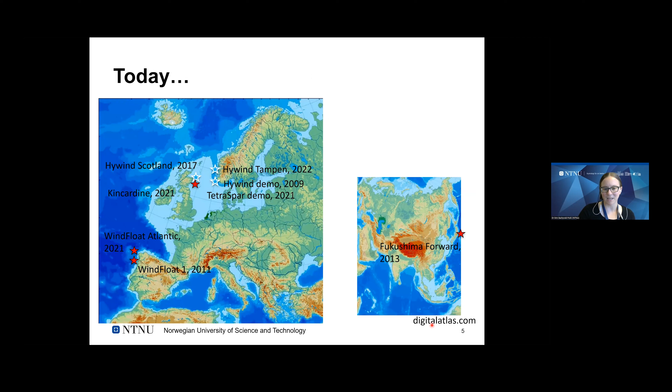If we speed up a few years and look at operational wind farms or demonstration projects today, we can see that a number of new ones have popped up, but actually a number of those are the same concepts still being applied. What's happened is that those concepts have just been upscaled in many ways.

On the left here, I'm showing how Hywind has grown, and this is very approximate, based on publicly available data. Not everything is publicly available, but you can see the 2.3 megawatt demonstration project, and what's being partially installed at the moment at Hywind Tampen, at 8 megawatts.

For Windfloat, I don't have an exact model of the Kincardine or other platforms, but they have indicated the size change with this Windfloat Pacific proposal, where you can see how a 2 megawatt prototype compares to a 6 megawatt platform.

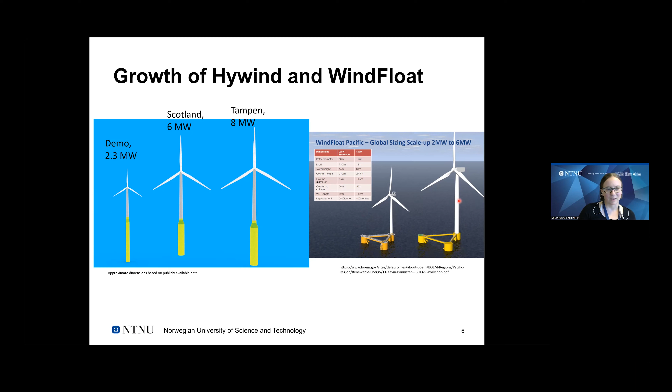Instead, I'd like to give a brief background to the different types of technology being applied, and then talk a little about where we go from here, especially with respect to optimization. The technology we see being applied, in this very fancy hand-drawn diagram, we could divide into the categories of spar.

Typically a deep drafted platform with a very small waterplane area has the advantages of being relatively straightforward to install. That's because it's got a catenary mooring system, slack mooring lines, which are relatively commonly used. The manufacturing is simple in terms of the components because you simply have cylindrical components to put together.

The disadvantage, of course, is that it requires a large water depth. And when I say it requires a large water depth, that's not only at the location where it's going to be installed, it typically also requires a large water depth at the location where it's going to be put together. So you might use a fjord where you can upright the spar platform so that you can install the tower and turbine on top. And then from that fjord, of course, you need large water depth all the way out to the location where the spar will be installed.

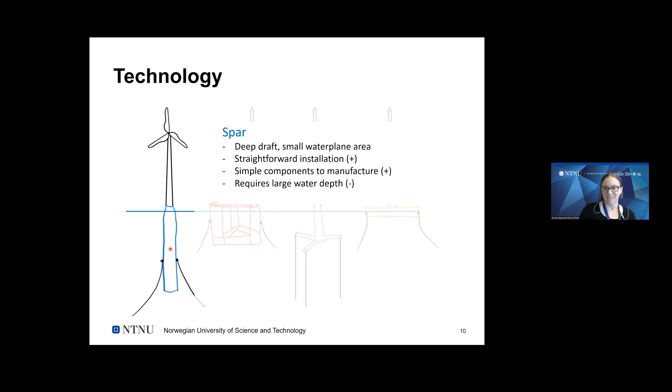Semi-submersibles are probably the most popular at the moment. These are characterized by these spread columns, which give them stability in a different way. The disadvantage of a semi-submersible is usually that because you have these spread columns, you're going to be more susceptible to wave excitation and might have larger wave-induced motions than, for example, the spar. Advantages, of course, are that you have a much smaller draft and you're more flexible with respect to water depth, and you can maintain this simple installation of the mooring system and just towing out the platform.

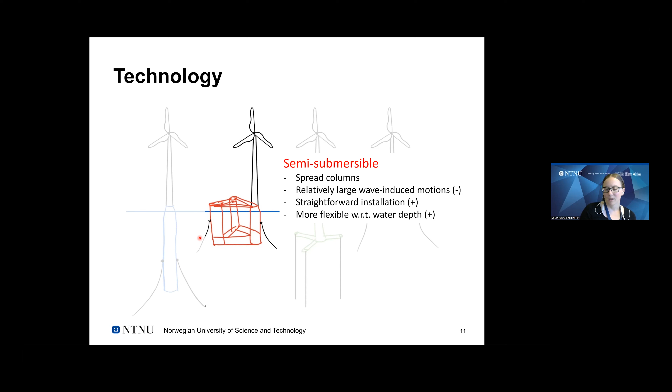We also have tension leg platforms as a possible concept, and here you might notice a relatively long list. There is perhaps some bias here since I wrote my PhD thesis on tension leg platforms. These have not been very popular for industry, however. One of the main reasons is that these vertical tendons, which need to be pre-tensioned, are expensive and challenging to install.

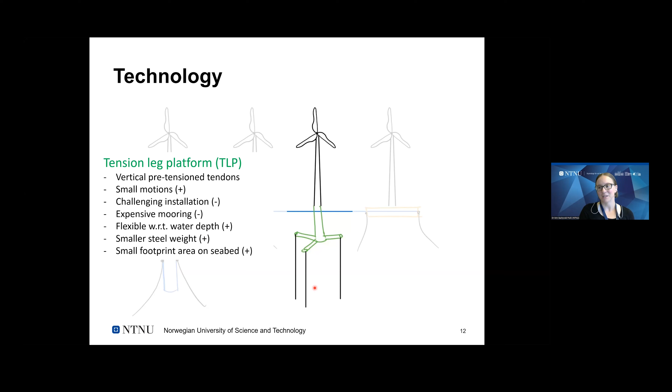The advantages could be that we have small motions, and we still have flexibility with respect to water depth, potentially a smaller steel weight, and also potentially an advantage of a small footprint area on the seabed, since we don't have a spread mooring system. That could be a potential advantage in cases when you might want to have fisheries or aquaculture sharing some space with the wind farm. On the other hand, you still have to deal with the power cable in some way, so there remain challenges there.

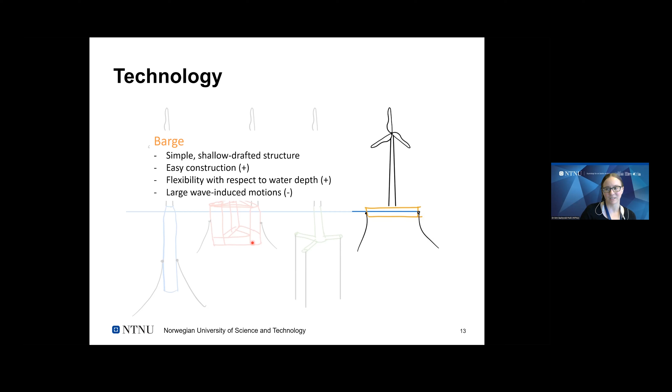Finally, we could have some concepts that we call barges, which have an even shallower draft than the semi-submersibles that we've talked about. And they have a clear advantage in terms of easy construction, very flexible with respect to water depth. Maybe they can even compete against bottom fixed in some cases. Disadvantage, again, you have a large amount of structure in the waterplane area, and that can have the disadvantage of making you more susceptible to wave-induced motions.

I've also put these into this stability triangle, which we sometimes use to illustrate how different platforms obtain their stability. Because of course, one of the first criteria for a successful floating offshore wind turbine is that it should float upright. This triangle has a point for ballast stabilized, meaning that you have a large heavy weight at the bottom, mooring stabilized, meaning that you're using the mooring system for stability, and waterplane stabilized, where you're using the waterplane area moment of inertia. And we can categorize those four types of concepts by where they are on this triangle.

So we put the spar at the top, the TLP at this corner, the barge in the buoyancy stabilized corner, semi-submersible somewhere in between. And even concepts that don't look quite like the ones that I've shown so far can be placed on this triangle in some way.

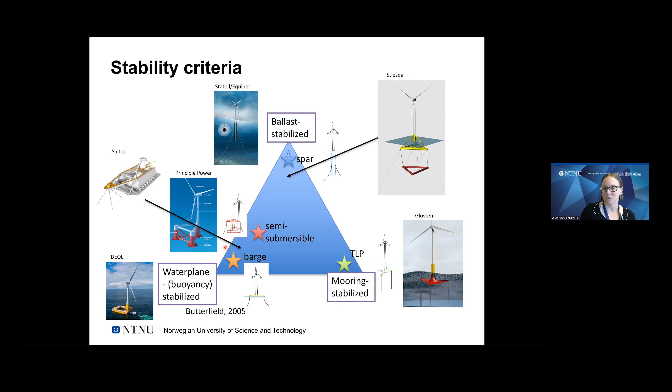If you've heard about the recent demonstrator installed in Norway, from Stiesdal, it can be placed as a spar because of its heavy ballast at the bottom. And if we look at the Saitec floater, which we'll probably hear about a bit more later, we can see that it would be closer to a barge type of platform.

So what is the actual challenge in all of this? Right now, the offshore wind industry is working to try to minimize what we call LCOE, the levelized cost of energy, while maintaining safety.

How do we get there? Well, there are two main contributions: upscaling, so larger and larger turbines, and optimization, so improving the technology, improving all the operations and maintenance and the supply chain all the way along. Dr. Sergenko is going to talk about upscaling. I'm going to focus on the optimization part.

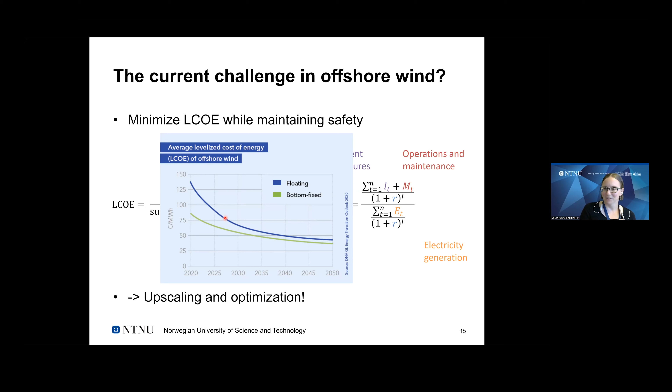Before I get into the optimization part, I want to make one more comment regarding LCOE, which is that it's a nice measure, but it really doesn't tell us everything. The real challenge we should be working on should go beyond the LCOE. Offshore wind is a non-dispatchable source of energy. It's intermittent, that's the nature of the wind, and that's hard to compare against a continuous electricity generation. LCOE also ignores environmental externalities, ignores other economic factors, and it's hard to compare new and existing generation.

One example of how LCOE might be a misleading unit to apply is if you consider that more and more wind farms are being installed, and the price you get for the electricity will depend on the other wind farms as well, because it's a question of supply and demand. We're now seeing that it may make a big economic difference to produce as much as possible in cases of low wind speed, when your neighboring wind farm can't produce as much. So there are factors hidden when we talk about LCOE.

Whether we talk about LCOE or beyond LCOE, what we saw before was a case where we wanted to minimize some kind of cost within some type of constraints. That is exactly an optimization problem. An optimization problem, and here are my last equations as promised, is defined by saying that we want to minimize something, an objective function. And that we can choose. We can choose it to be the cost of energy.

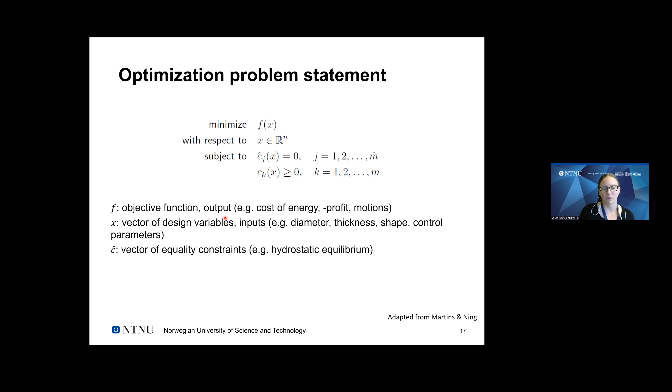Subject to, meaning we have some kind of constraints, which are either equalities that we have to match - for example, hydrostatic equilibrium has to be satisfied - or inequalities, like structural stresses that we cannot exceed, allowable accelerations in the platform, whatever you might choose to formulate your design problem.

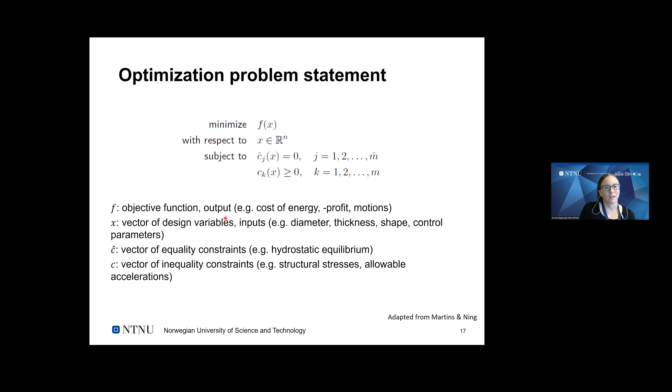In trying to do optimization of floating wind turbines, I would say there are maybe three main challenges we have to overcome to be able to really use computer-based design optimization beyond just human optimization efforts. The first is defining the objective and constraints. Second is parametrizing the design space. And the third is evaluating the candidate designs efficiently.

Clearly there's still a lot to be done on this, because if we look at the literature, we look at the market, there are a huge number of designs. I'm not saying we're necessarily going to converge to one, but probably we need to work more on defining what we mean by best, in order to say which ones will be most appropriate in which situations.

So if we look at our first challenge, defining the objectives and constraints, let's think about that a little bit. An objective function tells us what we mean by best. What does the word best mean to us? It's not quite that simple. It has to be something you can define mathematically, and also something you can estimate from the inputs you're given. A computer can only solve the problem exactly as it's posed, so we have to think really carefully about what we choose here.

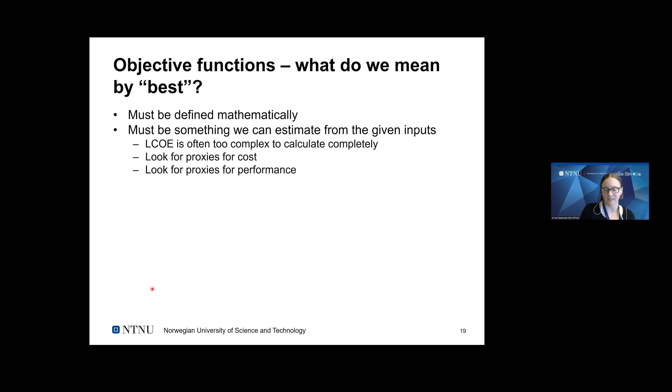At the moment in research, LCOE is actually probably too complex to calculate completely. Things like installation costs, operational costs, and even the details of construction costs are often beyond our simple tools at the moment. So we're often looking for proxies for cost, maybe mass of steel as a good example, and also for performance, so that we know something about the amount of power produced, but also about the quality of that power, how variable it is over time, for example.

We also have to define our constraints. So what do we require of this design? Again, it has to be something we can define mathematically and something we can estimate from the given inputs. Some examples might be: we have to have equilibrium, we have to have a certain amount of static stiffness so we can't have too large a static pitch angle, we want it to fit into a shipyard where it could be built, it needs to be able to be floated out, fatigue and ultimate loads, we can't have it failing too early, and things like nacelle acceleration related to the wind turbine performance might also be considered.

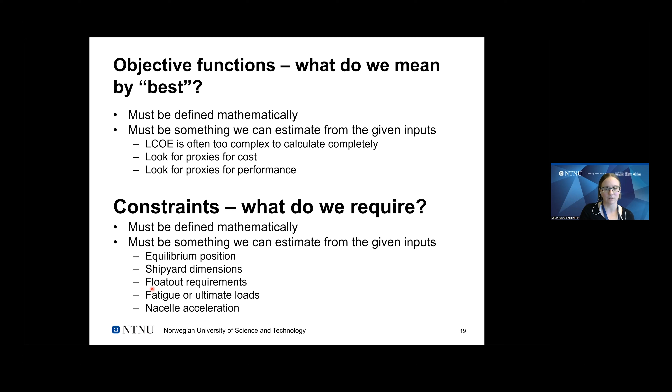If we can define the objective and constraints, we also have to define the design variables. So the second challenge will be trying to parameterize the design space, and here there are a number of choices that you can make.

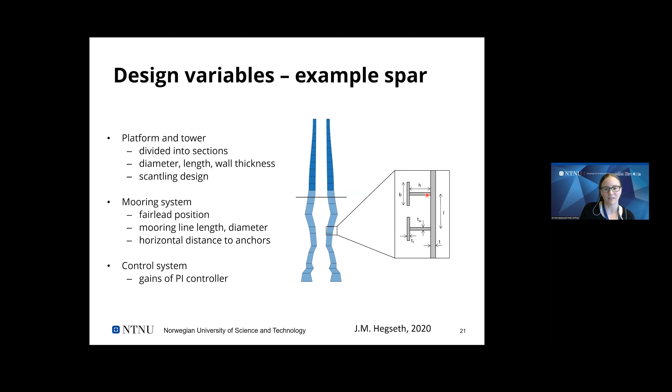Just to give you an idea of where we are in the research community, this is a first example, a 10 megawatt spar. In this case, the platform and the tower were considered as the design parameters, primarily for the optimization, along with a little bit of the mooring system and control system. The tower and platform were divided into sections, and each section could be given a diameter, a length, and a wall thickness. On top of that, we also had the scantling design, meaning we're trying to look at how much steel you might need in terms of stiffeners and the details there. In terms of the mooring system, there was the fairlead position, mooring line length, the diameter of the mooring line, and the horizontal distance to the anchors - quite simple.

We also included the control system in this optimization. The wind turbine has a controller for the blade pitch and generator torque. In this case, it was the blade pitch controller which was included in the optimization, and that actually makes a difference. Due to time, I'm not going to go too much into the details of that aspect though.

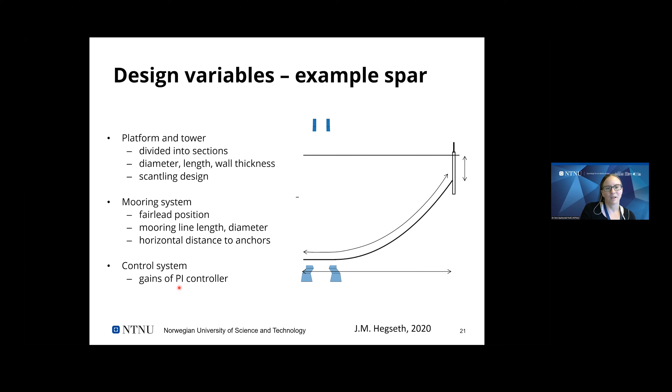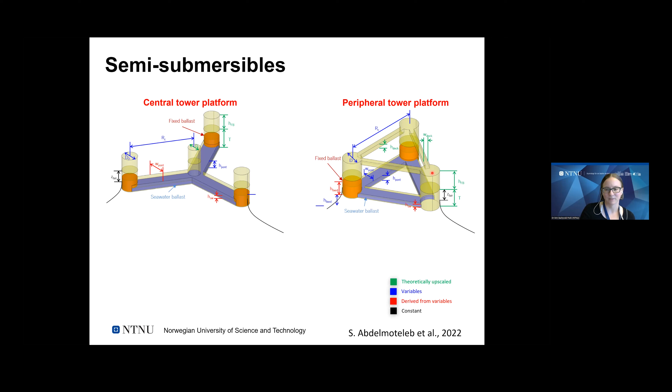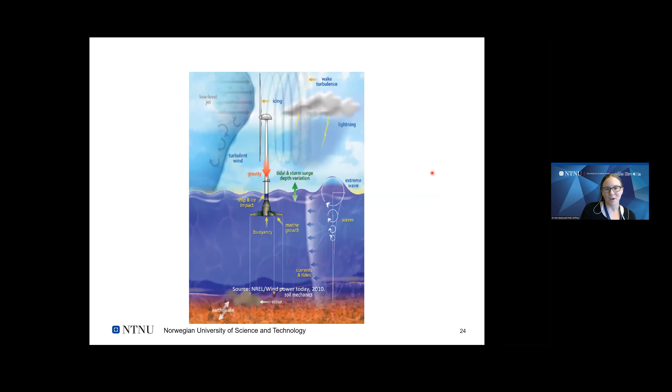Finally, the other challenge is to be able to evaluate our candidate designs efficiently. A floating wind turbine is an extremely complex system. If we look at this image, which I've always thought is a nice illustration, we can see all the different types of loads. We often talk about aero, hydro, servo, elastic analysis, meaning we need to take into account aerodynamics, control, hydrodynamics, and structural dynamics at the same time. That's because this is a complex, tightly coupled system.

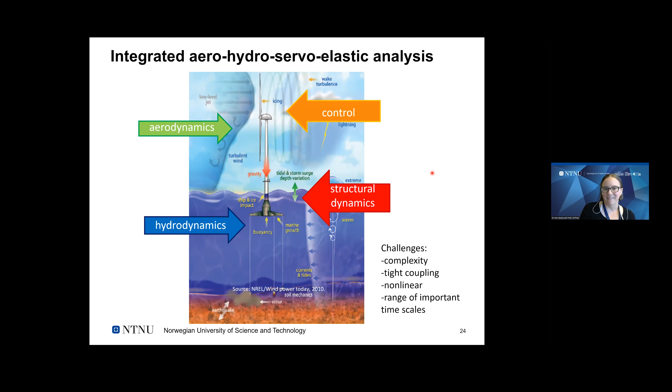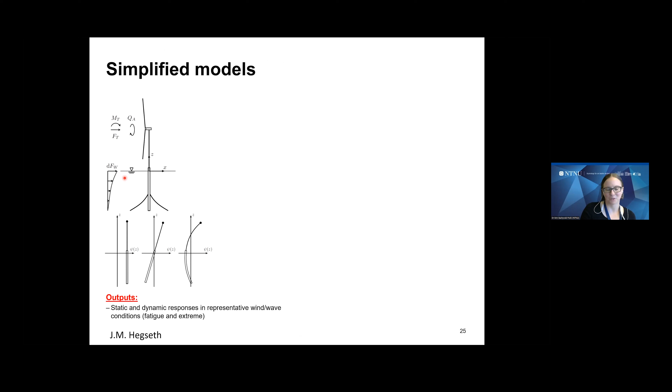Often we use nonlinear time domain analysis to do this type of analysis, but for optimization that's often going to take too long. So we're stuck trying to use simplified models at the moment. I'm going a little fast because of time, but we look at just graphically how much we're simplifying this image into a structural model consisting of 3 modes plus the rotor rotation, or replacing the whole platform and its hydrostatic stiffness and the mooring stiffness with springs, masses, inertias, and a few beam elements for the tower.

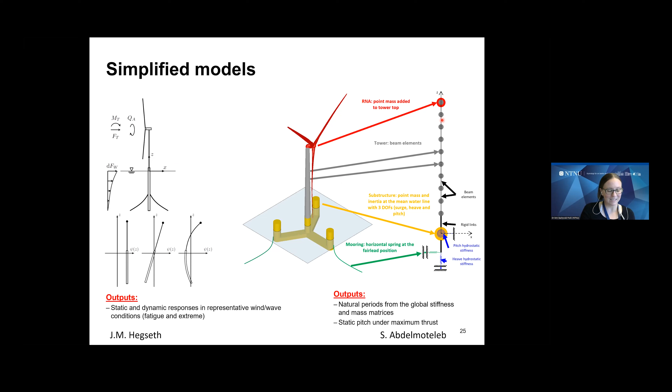So we're at that level at the moment. Still, we can get some interesting insights by using this. So I want to go through a couple of results very quickly here as well.

The first result I want to show is from the optimization of a 10 megawatt spar. What you're seeing on the right is an illustration of the shape of the platform and the tower.

When you look at this, don't be too misled by the fact that we've tried to make things visible. How have we done that? Well, look at the scale—it's actually much, much longer relative to its width. And if you look at the thickness, that's exaggerated by a factor of 40 compared to the diameter. So it looks really quite thick, but it's not in reality. If we drew it to scale, you wouldn't be able to see much of anything.

Here we've ended up with an interesting shape. Does that shape make sense? Yes, it does. We are able to put a lot of ballast down here, move our center of buoyancy up here, and then we're able to deal with the fatigue loads in the tower by having this thicker section around here.

What we can also see by the colors, which on the left show the fatigue utilization and on the right the buckling utilization, tells us the hull is driven by buckling, while the tower is largely driven by fatigue.

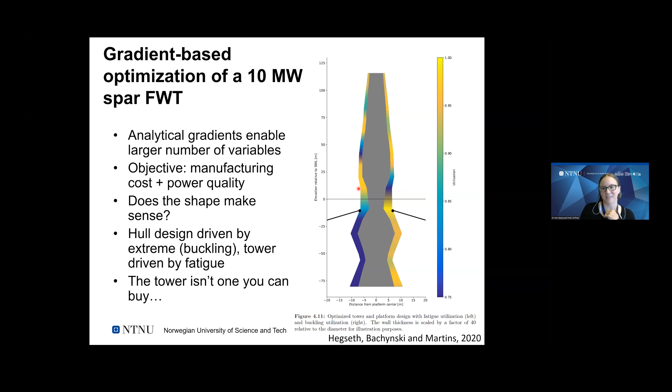One thing you might notice though, is that that tower isn't one you can buy. The normal towers are linearly tapered—they start biggest at the bottom, smallest at the top. Ours doesn't do that. Okay, fine, we can do the optimization that way too.

We can see what happens if we force the tower to be linearly tapered, and also what happens if we force it to be linearly tapered with a fixed base diameter. What we see is that if you make those choices, you get a different platform and a different cost for your tower and your platform. And those are both larger than what you would have if you optimize the whole system at once.

I hope that's a direction the industry will be able to go soon—to actually be able to do integrated optimization.

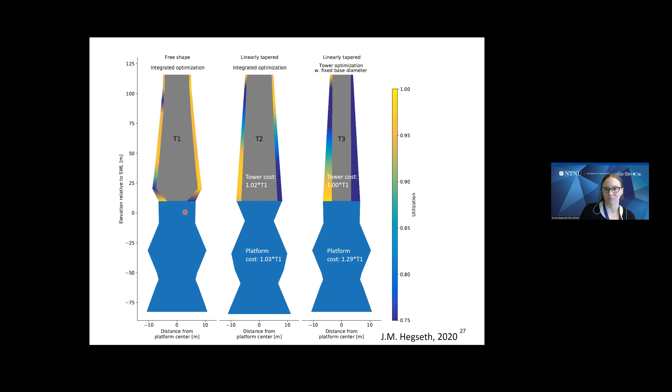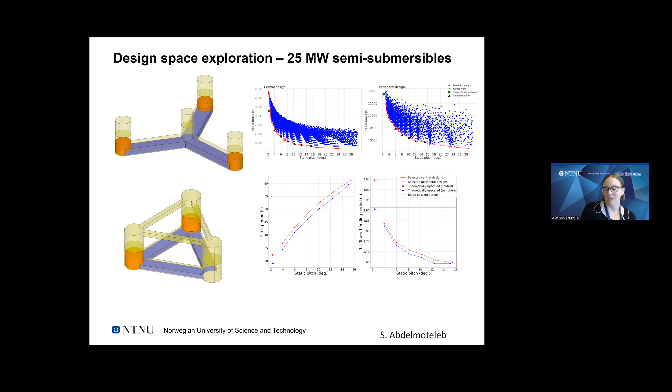What you can see is that the theoretically upscaled designs are really too stiff. They have such a small static pitch angle, and you could get a huge reduction in steel mass if you just accept a slightly larger static pitch angle than what theoretical upscaling gives you. That means we have room to do optimization at the same time as upscaling.

So just to finish off, where do we go from here? Well, in the webinar, we go from here to hearing about upscaling, also from the industry perspective. And from the optimization side, we need to add more industry perspective as well. We need more measurements of the cost of installation and the actual costs of construction. We also need to add improvements to our numerical models so we can take additional factors into account and make sure they're still in good agreement with higher fidelity models.

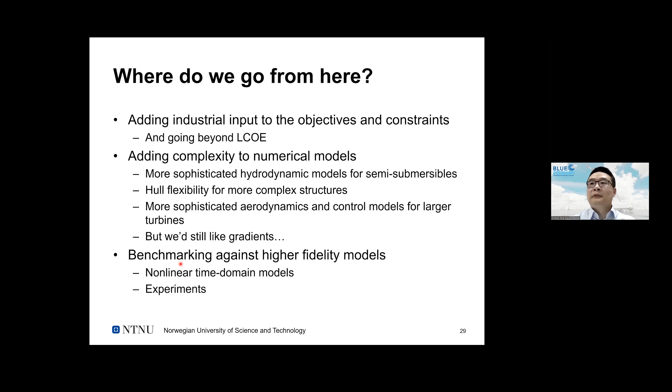I think I've used up my time, so I'm sorry, Boyan, if you're watching the clock carefully. I'll stop here—thank you very much for your attention.

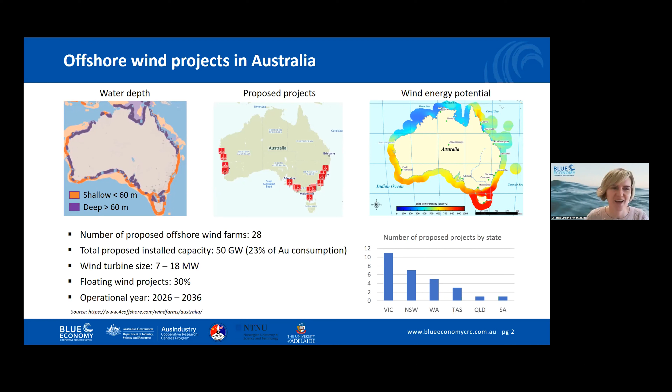So talking about my presentation, let's assume you are a developer and you designed an amazing platform for a 5 megawatt wind turbine - could be 2 megawatt, whatever. You created a platform and you would like to change its size, its design, upscale it somehow to support a larger wind turbine.

So what should you do in this case? Unfortunately, I don't have an answer to that question, but I did my investigation keeping that question in mind, and I might provide some guidance for industry to follow. In general, platform developers adopt commercially available wind turbines without any changes, and they try to manufacture or design the platforms considering different technical and economical criteria.

I will start - in order to design a platform, we need to understand what's going on and how the wind turbine is changing with changing power. And then I will move on to the platform.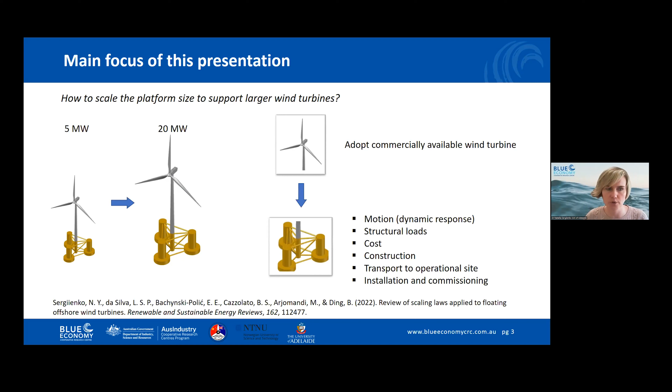Starting with the wind turbine. Over many years, people were asking themselves how large a wind turbine can be built. For any engineering system, if we want to increase its size, some parameters, forces, change according to the area.

Quadratic to the length scale, while other parameters change proportionally to its volume, as a cubic. So if we take an example of the aircraft - if we want to increase the size of the aircraft, its lifting capacity will increase proportionally to the square of the length, while its weight will increase proportionally cubically.

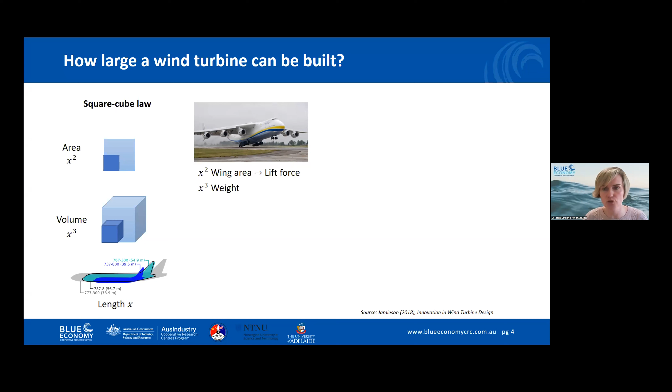And it was a discussion - we might have a limit for aircrafts, like a technological limit, that they cannot build larger than some particular size. And actually, if you put the size of aircrafts on a logarithmic scale, you can see there was exponential growth in aircraft size until it reached a plateau, and we don't see aircrafts larger than, let's say, the A380 anymore.

So is this case the same for wind turbines? If we take the rotor diameter as a length scale, power production of the wind turbine will increase somehow proportionally, quadratically to the rotor diameter, as a square of the rotor diameter. While cost is proportional to the mass, and mass theoretically will increase as a cubic. We don't want power production to increase slower than the cost.

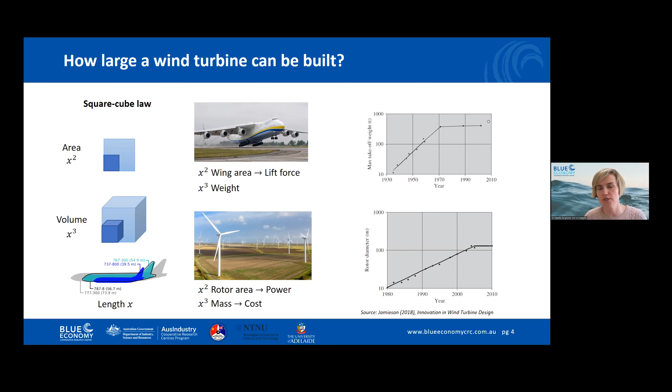However, if we put a similar map for wind turbines, we can see also there was exponential growth in wind turbine size until they reached like 5-7 megawatts, and now we don't see that huge dramatic increase anymore.

But blade mass is not the only cost driver. So what about nacelle mass? The nacelle has the generator in it, has a hub and rotor itself. But mass of the nacelle increases cubically.

So that's why about 10 years ago there were several research papers where people were questioning, can we build wind turbines larger than 5 or 7 megawatts and have them produce cheap electricity? But now we know that yes, wind turbines can reach - last year it was a 14 megawatt wind turbine, and this year, just one week ago, a 15 megawatt wind turbine was announced. So yes, wind turbines progress and become larger.

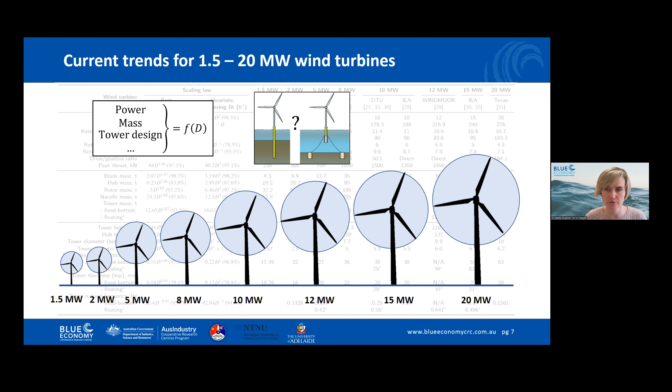And those wind turbines were designed for offshore applications. Some of them are floating, some of them are fixed. Some of them are not manufactured yet, just designed on paper. We collected lots of data for those wind turbines, and we tried to understand how different parameters - power, mass, tower design - change with increasing rotor diameter, and whether there are any differences between wind turbines installed on a monopile, fixed, or on a floating foundation.

So the first out of many parameters we analyzed - I will show you just several. We found, for example, power is changing as diameter to the power of 1.8. It's a bit less than the square dependence as theoretically predicted. But what about mass?

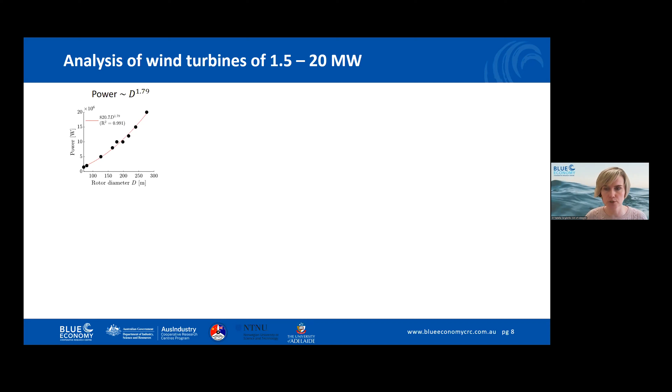We also analyzed blade mass, nacelle mass, and tower mass, and I was glad to see that with technology advances, companies and manufacturers were able to achieve close to quadratic scaling law for all the mass components. What's also interesting is that wind turbines starting from 10, 12, 15 megawatts start utilizing direct drives instead of gearboxes. There was lots of discussion about whether the generators for direct drive wind turbines would become heavier, but we can see the gray dots on the plot showing wind turbines with direct drive, and they are quite perfectly aligned with the general trend. So direct drive does not really change the total nacelle mass.

So what about height? Unlike onshore wind turbines that are installed higher and higher to capture stronger winds, offshore wind turbines, regardless of whether it's 1.5 or 20 megawatts, are designed to leave a clearance between the water surface and the lowest point of the blade tip. That clearance is around 30 meters, in order to leave space for ships to pass.

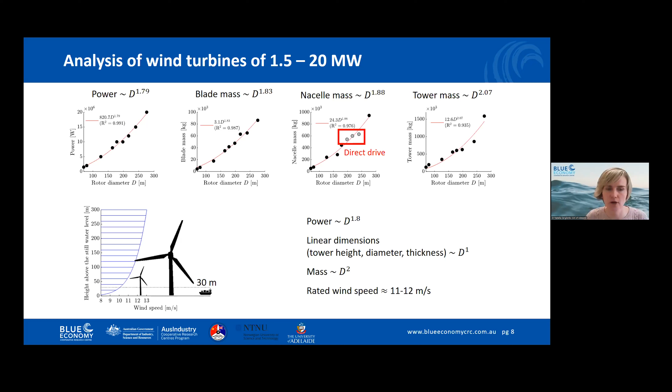So in general, we analyzed lots of different criteria, but we found that with current trends, power increases with close to quadratic dependence on the rotor diameter. All linear dimensions, tower height, tower diameter, and tower thickness, change linearly with the rotor diameter, while mass has a quadratic dependence. What's also interesting is that all those wind turbines, whether 1.5 or 20 megawatts, target a rated wind speed close to 11 or 12 meters per second. So we cannot say that large wind turbines target stronger winds; they're designed for similar wind conditions.

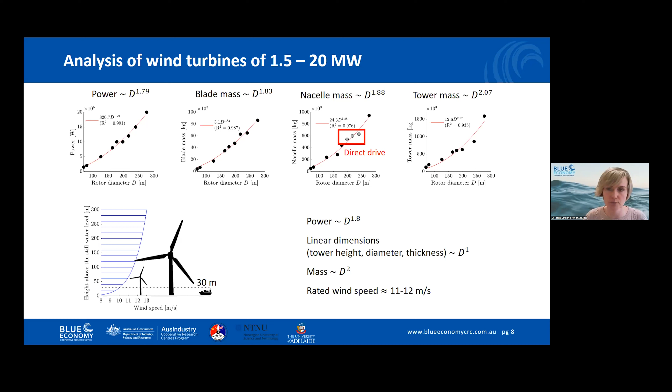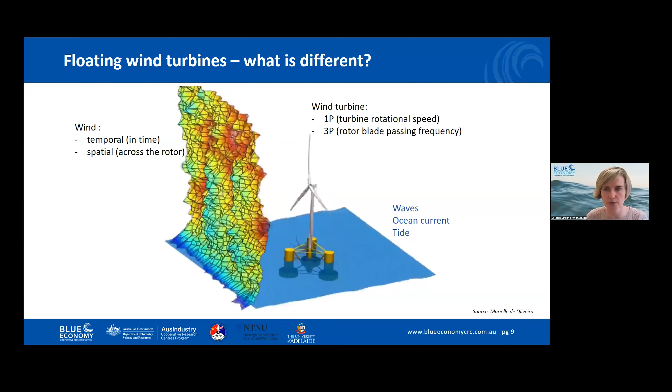So when we start moving to floating platforms, what's the difference? In addition to the usual disturbances, wind changing over time and rotating blades across the rotor, we now have new sources of disturbance like waves, ocean current, and tide. That's why companies need to reconsider things, maybe change the control system of the wind turbine, or change the tower, in order to accommodate those disturbances in the design.

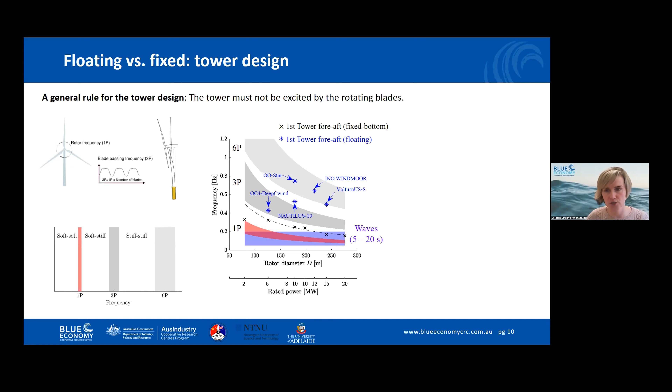But once we put the same tower on a floating foundation, we have waves, and that's not what we want, because as rotor diameter grows larger, the tower starts being excited by the waves. If we overlay tower designs specifically for floating applications, we see developers trying to place them a bit higher, avoiding that wave excitation region entirely. So the general rule is that towers for floating wind are stiffer and heavier. Diameter is probably kept the same for fixed and floating applications, but the walls should be kept thicker.

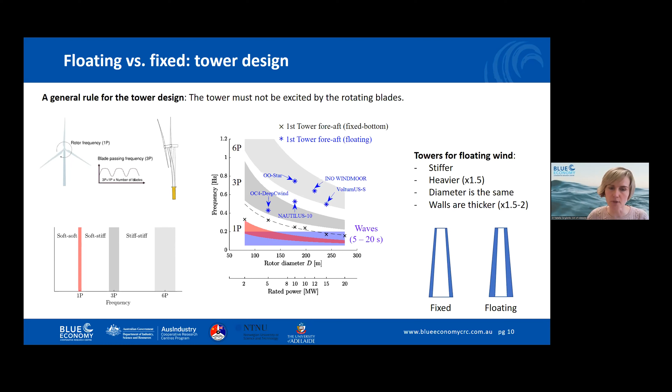Now moving on to the floating platform. How do we design the floating platform? Lots of industry partners here already know this. The platform should just float, should support the tower and turbine without sinking. The main idea is that it should keep the wind turbine in an upright position, with the maximum allowed angle of motion less than 10 degrees from vertical.

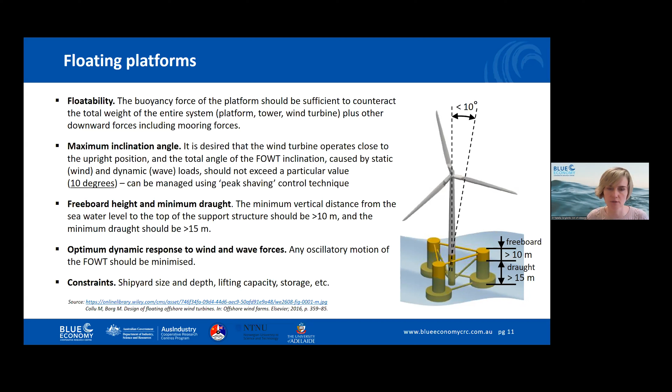Also, specifically for the semi-submersibles, that draft should be kept more than 15 meters, while freeboard should be more than 10 meters. And of course, the platform should be stable enough, and its motion in waves should be minimized.

So now going to the key question. Let's say you have a platform designed for 5 megawatt. What should you do in order to redesign it or change its size to accommodate a 20 megawatt wind turbine?

We reviewed lots of different approaches proposed in literature by the industry, and we identified 3 different scaling laws. The first is called power scaling. The main idea is you need to increase the linear dimensions of the platform in a similar way as the linear dimensions of the turbine. So if the diameter of the turbine increased twice, then the linear dimensions of the platform should increase twice as well. However, with this approach, mass and cost of the platform increase faster, leading to a much heavier and more costly platform, which is over-designed but much more stable.

The next scaling law is called mass scaling. So we don't talk about length anymore, we talk about mass. If the mass of the wind turbine increases 4 times, we need to increase the mass of the platform also 4 times. But in this case, platform dimensions will increase slower. This trend is really close to the existing trends observed in industry.

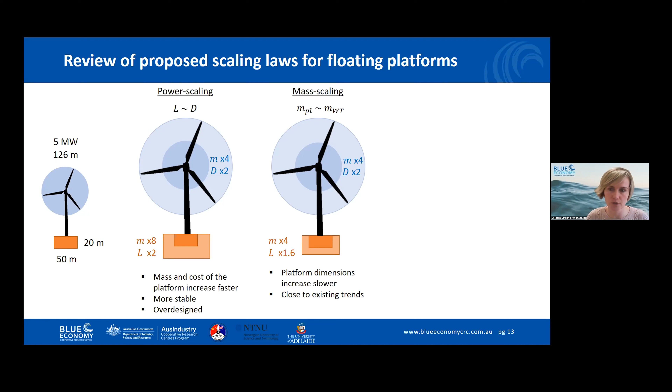And the last scaling law is called fixed draft. Again we are talking about masses - the mass of the platform should increase in a similar way as the mass of the turbine, but with the constraint that we need to keep the draft of the platform the same. So either it's 5 megawatt or 20 megawatt, the draft should be 20 meters, say. In this case, the horizontal and vertical linear dimensions of the platform scale differently.

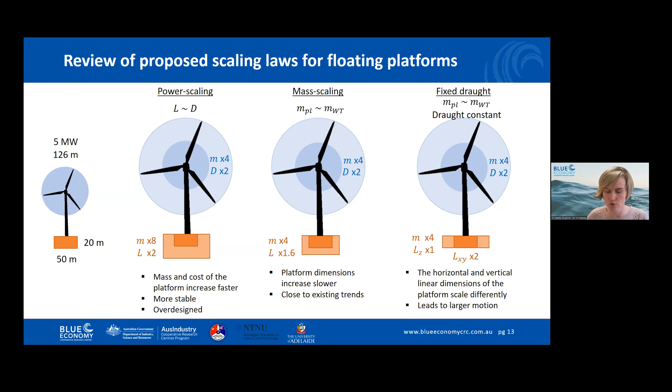We did a numerical analysis comparing all 3 different scaling laws, and we identified that the last scaling law leads to much larger nacelle accelerations, which is really undesirable for the platform developers and the turbine.

So what's exactly going on in practice? What kind of designs are proposed and what is common for those designs? We identified 8 different semi-subs, focused just on semi-subs, and took 8 different designs. Of course, we couldn't find any common features - some use 3 columns, some use 4 columns, some use braces, some use heaving plates and so on. So it's hard to get what's common for those designs.

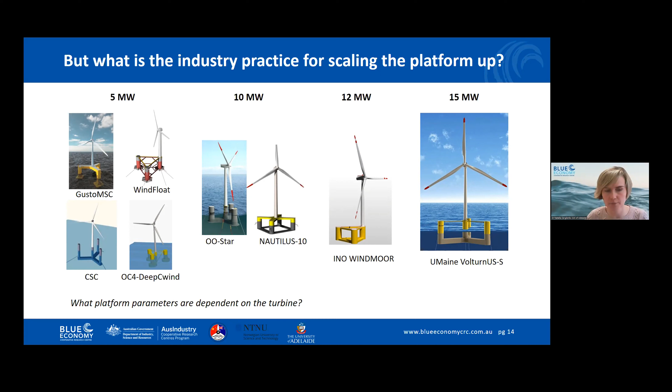But the main question we had was whether there is a parameter that is common for all of them - maybe some feature that developers keep consistent once they try to increase the size, perhaps a parameter related to the rotor diameter.

So again, we collected lots of data, and you can see the differences in design - some use passive ballast, some active ballast, some are made from steel, some are made from concrete, draft completely different, starting from 13 meters up to 30 meters. And the contribution of the platform to the total mass of the system varies between 80% and 90%, or even 96%.

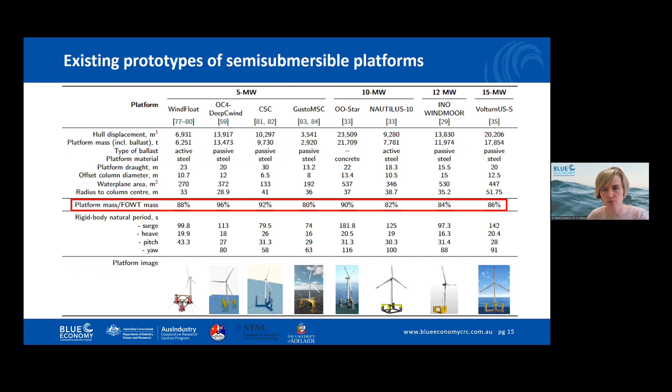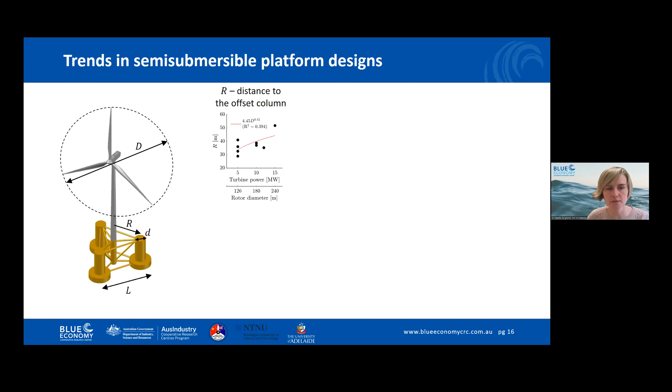But still we tried to identify what is a common design parameter which drives the design of all those platforms - in terms of the semi-sub, what is that length scale? We looked at several parameters, but 2 major ones: the distance to the offset column, called R here, and the diameter of the offset column, called d. We tried to identify the trend, but with only 8 points, not enough data, we couldn't get a good fit - distance to the offset column is not scaling proportionally to the rotor diameter.

Then we checked whether the diameter of the offset column changes proportionally - again we got a poor fit. Maybe it's the mass - again poor fit. So we played with lots of parameters and identified it's the product of the distance to the column and the diameter of the column.

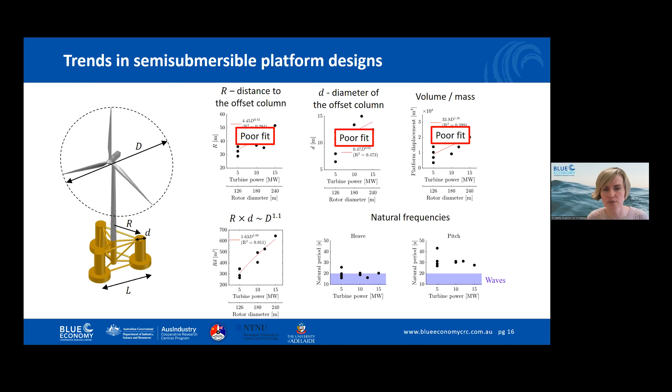And because that parameter drives the pitch stability of the platform, that's the common thing that all companies try to keep the same regardless of size and regardless of their design. Also, talking about natural frequencies, across all the designs and all the different wind turbine sizes, all the developers try to keep the natural frequency of the platform in heave close to 20 seconds.

You see that, yes, those platforms can be excited by waves and will move with waves, but heaving motion, like up and down motion, is not really critical for power production, while pitching motion is very critical. That's why developers are trying to keep the natural period of the platform in pitch quite higher.

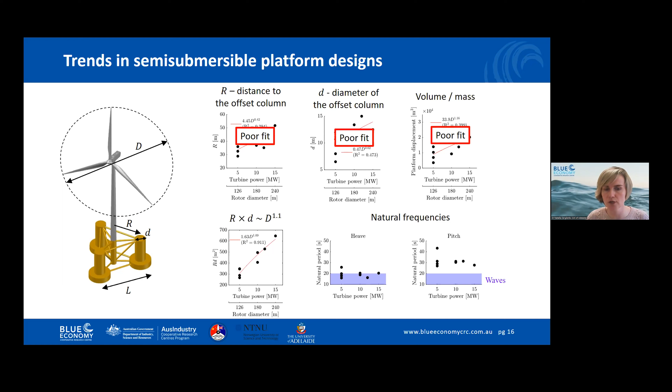Outside that wave excitation region and close to 30 seconds. So in general, what we have found is that platform linear dimensions have not increased proportionally to the rotor diameter. Developers try to keep the platform draft close to 20 meters. Natural periods for the platforms across different sizes and designs are kept similar. Contribution of the platform to the total mass of the system tends to decrease, but slightly, and some platform developers try to use mass, active ballast to decrease the mass.

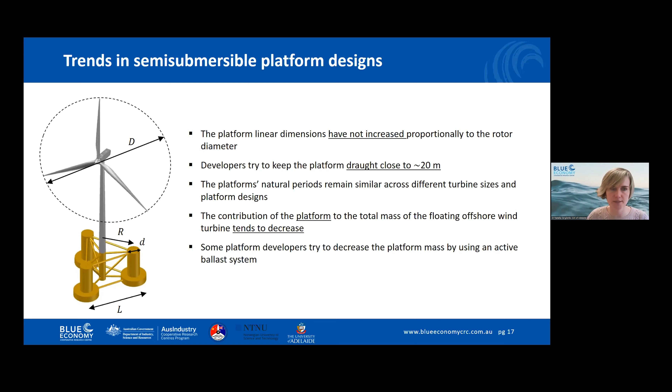And just the last bit, take-home messages. So if you want to design a platform for larger wind turbines, and the wind turbine parameters, you cannot find wind turbine parameters, as they are not released by the manufacturers. You can use our data to extrapolate the data to mass and inertia properties for larger wind turbines.

Then in terms of control, you can consider modifying the blade pitch control to ease the requirements for the platform design. Then for the tower, consider designing a stiffening tower for installation on floating platforms. And also, if you want to upscale, I would start from the mass scaling law. So you can start from that, increase the size, increase dimensions, see how it performs technically and economically. And then you can follow the optimization, like explained by Erin.

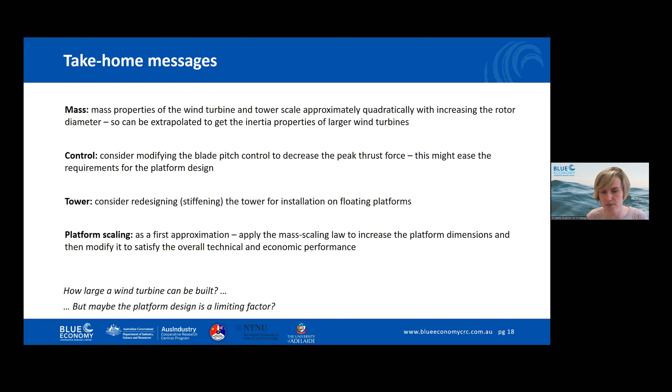And initially we asked ourselves how large a wind turbine can be built. We don't know the answer to that question, but maybe the platform design will be the limiting factor. And that's a question that can be answered by industry-university collaboration. So thank you for watching.

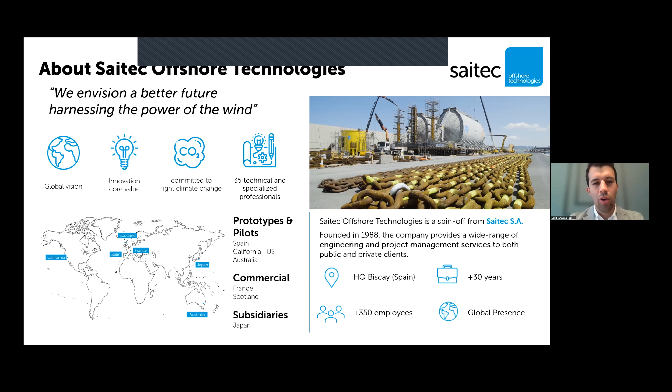Having said that, I'm here today to provide a bit of a flavor of what's the market, which are the challenges, and also what Saitec is doing in floating offshore wind. So starting in the market view, Erin did an introduction about the technologies. I will look more at the opportunities and the size of the upcoming market.

So for now, speaking only about floating offshore wind, we have 120 megawatts which are operational. Those are distributed along Europe and Japan mainly. Also China has some units. That figure will now increase by 88 megawatts with the Hywind Tampen project when this one gets operational, but it's not still operational, so we are still at that 120.

Aside those 120, there's 170 megawatts which are secured. Final investment decision has been taken, so these are projects that will happen.

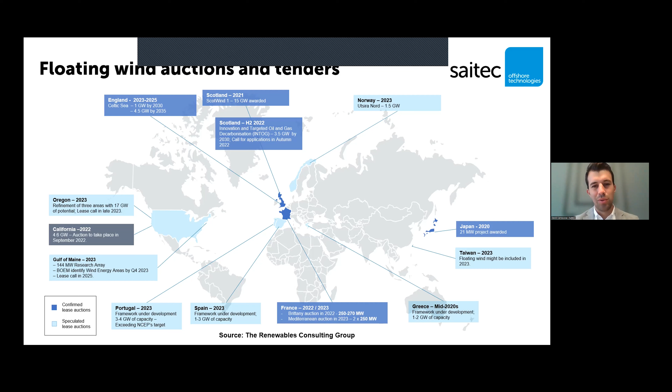The news are booming with new roadmaps and new auctions. We will start in France with the first commercial auction this year. That's a 270 megawatt auction aiming to get the very first floating offshore wind commercial farm into operation before 2030. I won't go into each of them because of limited time, but it's sufficiently interesting for global companies to push for developments.

So if we go to a summary again from the Renewables Consulting Group, we've got to understand that even though auctions will happen this year and for the following years, the megawatts tendered will increase significantly over the years. It takes time - from the award of a 200, 600 megawatt wind farm to its execution.

Once a project is awarded with a tariff and grid connection, you start the environmental impact assessment, which lasts about 2 years. Then you do engineering in parallel, then procurement and permitting. All those steps need to be taken, and in new and emerging markets, times tend to last a bit longer.

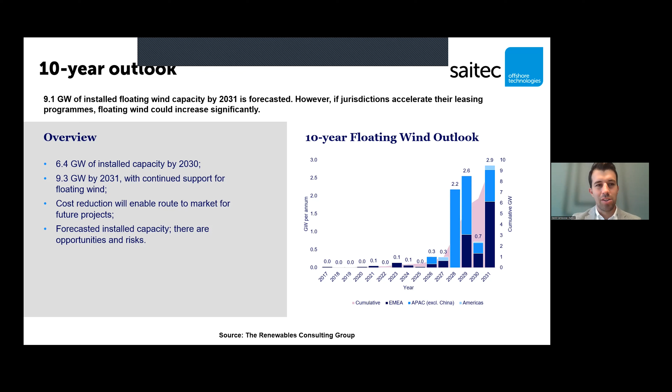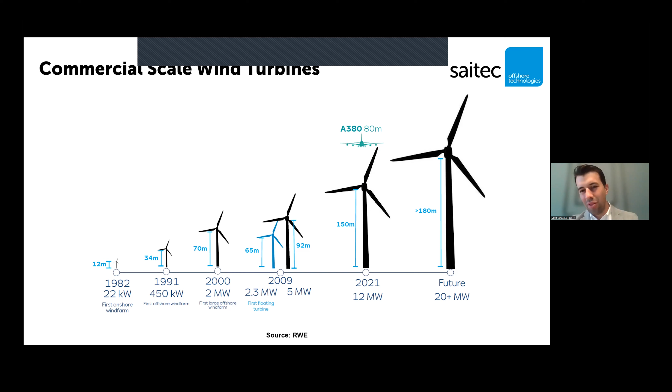And on top of that, we've got to put that on top of a floating platform.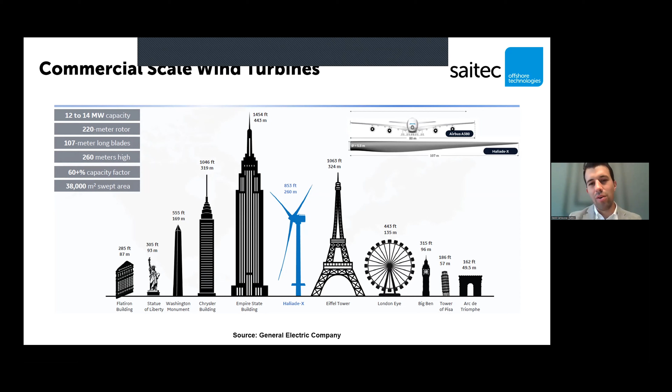Let's go now to something else that's also challenging: a table coming from RWE, our partners in the 2 megawatt demonstration project, showing a wish list of the kind of characteristics and features required in a port to accommodate the construction of a commercial-size floating offshore wind farm.

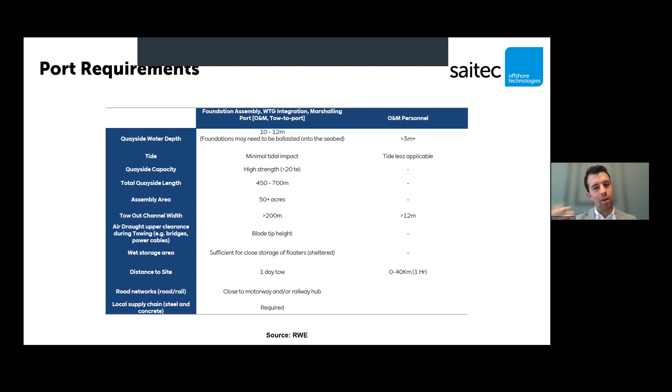We see the quayside water depth should ideally be 10 to 12 meters, having minimal impact on tidal. The dimensions we need are in the order of 50 acres, more than 20 hectares. If we're going to transport the floaters already assembled through a channel, that channel needs at least 200 meters in width. We will have structures of incredible height, so that needs to be taken into account if we are going below a bridge or power cables.

We've also got to have sufficient wet storage area in the port to store the floaters, because you'll be producing floaters all year, but installing them offshore only during the installation season. That season depends on the weather in your location. It's not the same installing platforms in the North Sea versus the Mediterranean Sea, where the installation season is much larger because the wave regime is much lower compared to the North Sea, for example.

So these are some of the requirements from ports, and I can tell you, after analyzing ports worldwide, that these kinds of things are very difficult to be met by a single port.

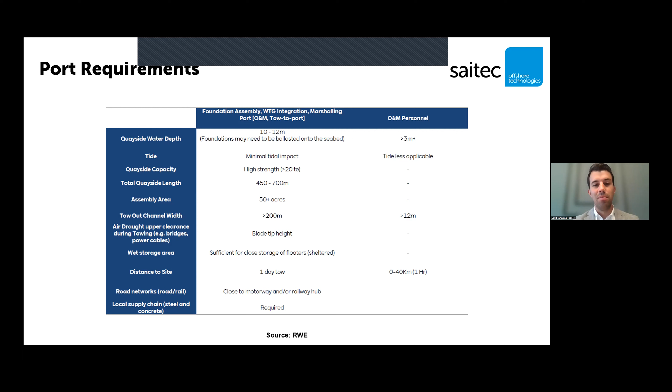So in summary, some of the key challenges for commercial development of floating offshore wind: first, availability of area in ports. It's easy to say we need an area greater than 20 hectares, but ports aren't usually waiting for floating wind, ready to reserve 20, 30, or 40 hectares for 2025 when you'll be executing your projects. Ports are there to profit from every square centimeter of their area to generate cash flow for the port.

Regulatory frameworks are also key—usually a bottleneck for development. The industry is ready, but the regulatory framework and the structure for auctions and so on is not ready for the projects, and that's something we need to push for.

Again, every market is an emerging market for floating wind, and the supply chain is usually not prepared or ready for the sizes of these units—the amount of chain, steel, and concrete that has to be produced. So we need to support the supply chain for us to be ready for these next steps.

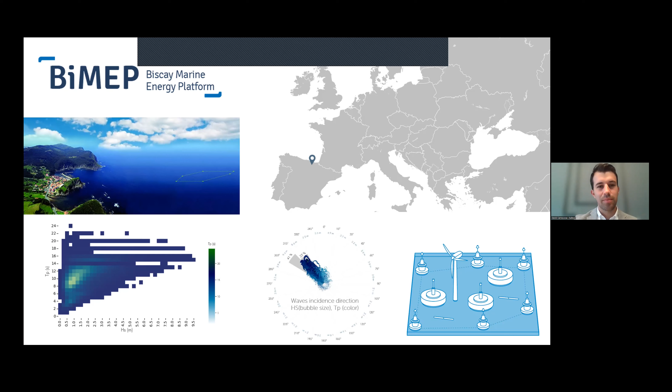We will have maximum waves of up to 20 meters. That's for the 50-year return period, so that's the value we use for design. And yeah, it's a very harsh, but also it's a very good place for a proof of concept.